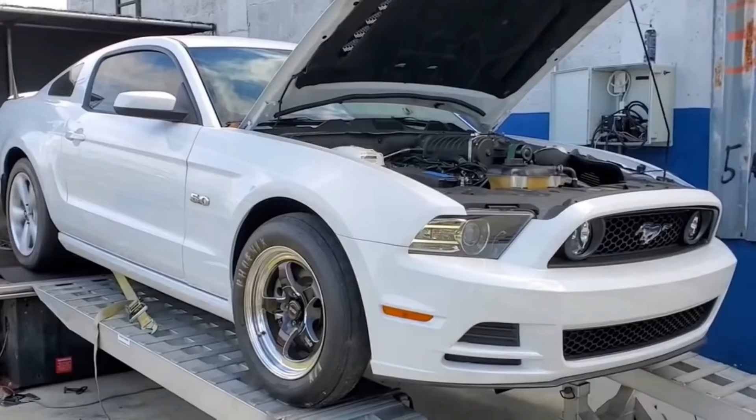What's up guys, it's Alex, and today I'm gonna play around with the white car a little bit. Why? Well, about 2 or 3 months ago, the car's been on pump gas. For those who don't know about the white car, it's a 2019 Mustang manual with a Vortech V3 supercharger. About 2 or 3 months ago, I started noticing the car starting weird, like it just turned on differently than I was used to. So I'm like, what's going on with your car?

Obviously I don't have the inlet on, and I'll explain why in a second. After driving it around for a while, I noticed it wasn't driving to its full potential. It made good power, but again, it's a daily driver. I don't dyno it, I don't go to the track often at all - the car has never been to the track. I just do 60 to 130 and drive it everywhere. But it started to start weird, meaning you go to start it and it goes jigga jigga jigga jung.

When you're used to your car, it normally goes jigga jigga jigga, you know? But this thing would go jigga jigga jigga jigga - it would kind of have a bit of a stutter. Hey, what's going on with you, buddy?

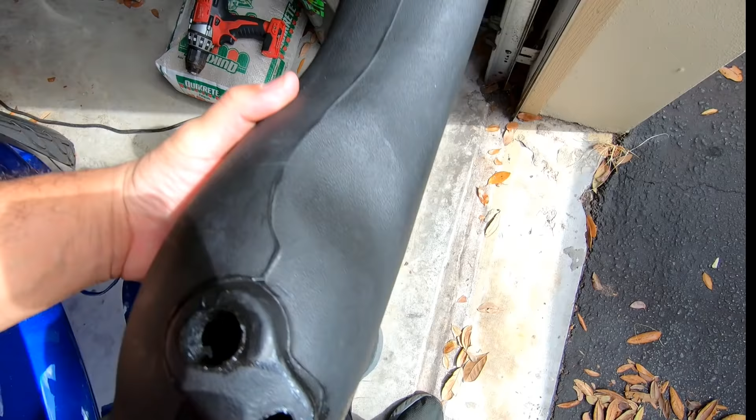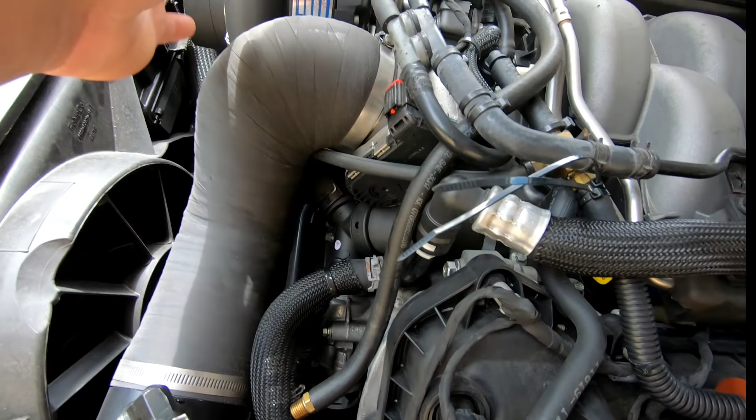All right, this guy - here we go, right here. So this would go onto the tube, right? Just go on there, and this is the IMRC stuff, but you can leave them open if you don't run the tube. So I started noticing, because this does not have a catch can, how much oil can potentially get accumulated and pushed into the blower.

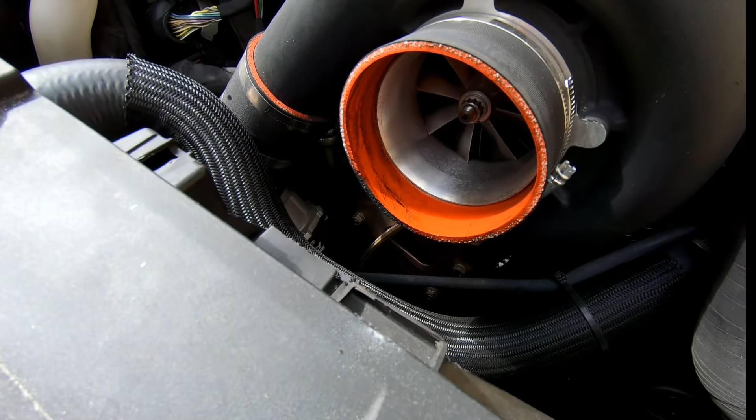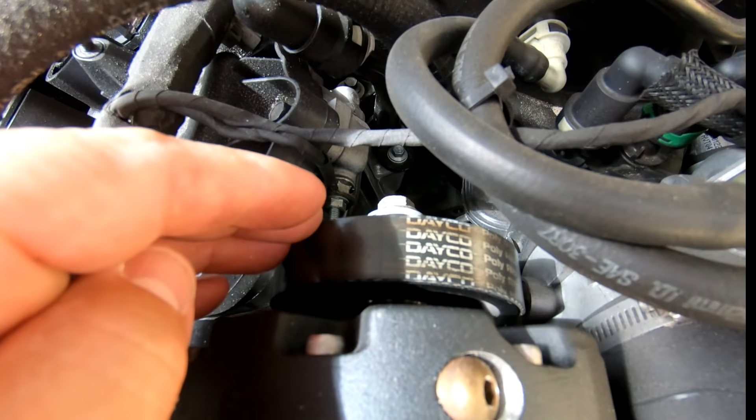So I said, okay, let me eliminate that, right? Once I eliminated that from the equation, I should just take this boot off. Once I eliminated that, the car felt stronger, but it was making almost a little too much boost for pump gas. It was only 10 PSI, because this is a 3.6 pulley, so it was only making about 10 to 11 PSI.

But these centrifugals can really get it - like they legit can get it. This is only a Vortech V3, a little Vortech V3 JT, and they can get it. They can actually whip up a decent amount of power.

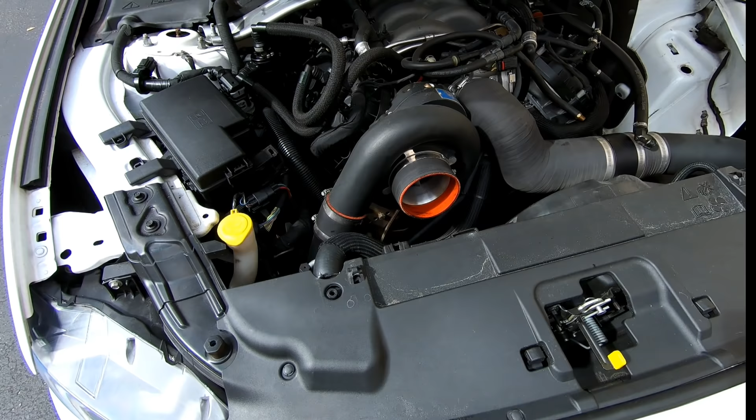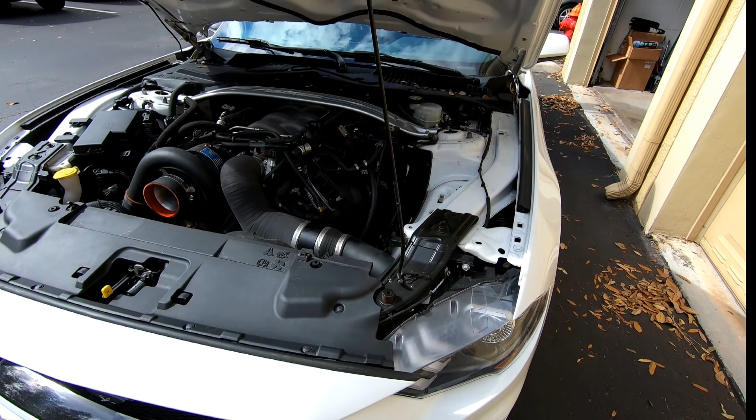So this car made about 700 rear horsepower on pump gas, which in my opinion is too much, because one day you can get a good batch of pump gas, and the other day you might not get the best batch. So what am I going to do? I'm going to put some C16 in this car and rag it out.

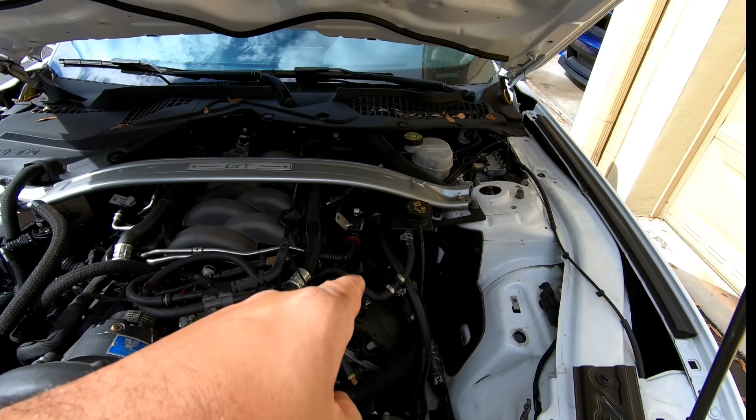Why? Because after noticing how it starts, I started noticing it wasn't feeling all that great. I said, Jake, let's do a compression test. Number 7 - not the one, number 8, this is 1 2 3 4 5 6 7 8, bank 1, bank 2 - so number 7, the third one down, was down 15%.

So I'm like, well, I must have popped a ring land or something based on crappy pump gas being in there. Again guys, if it was E85 or race gas all the time, I wouldn't care. But it's not race gas and E85 all the time. So I said, screw it, it's probably already hurt, so I'm not really gonna care. I don't race it, I just drive it around, and it's not affecting it adversely. So let me just drive it around.

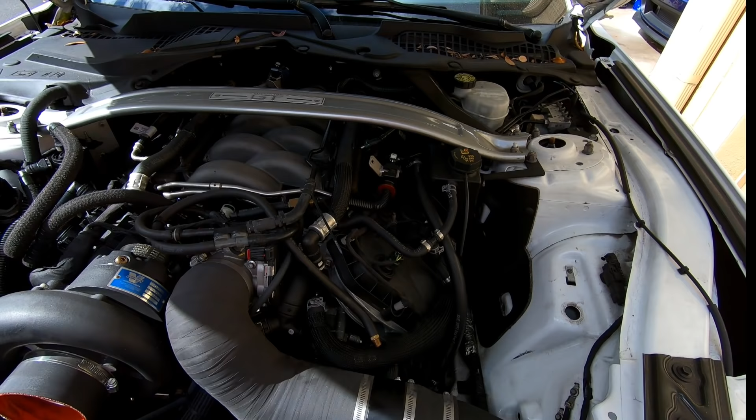So after a little while, I said, you know what, I was able to come across another Gen 3 engine. Jake from Power by the Hour got me another Gen 3 engine. And I said, you know what, let's rag this sucker out. And if it blows up, who cares? The clutch has 31,000 miles on it - it probably needs replacing. I got a shifter and a clutch from a fan.

Thank you very much. And I said, why not just rag it out and see what it can do? See what goes first—is the motor going to go first, is the clutch going to go first? And what am I going to do?

I'm going to put C16 in the car. I bought 3 jugs of C16 right here. Why C16? Well, it's a dense fuel, and this car does not have a fuel system, so I said let me get C16 in the car, which is like 14.7 stoic. And with a booster pump and FIC 1440s, I might even be able to pulley down to make more boost.

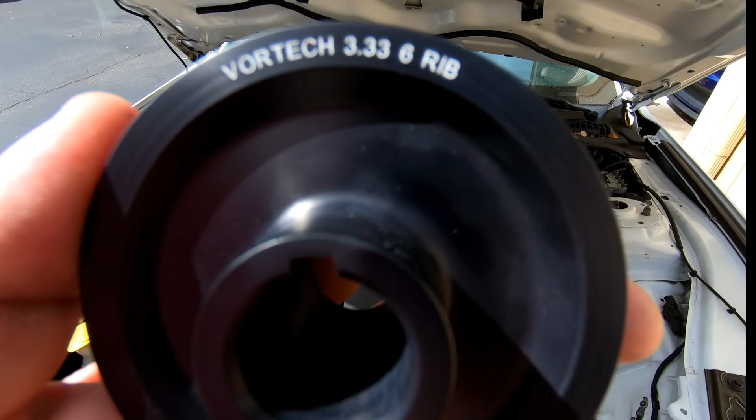Which then brings me to my recent purchase from Team Beefcake Racing, a 3.3 6-rib Vortech pulley. This should make about 14 PSI. And every single time I've tuned a car with a 3.3 on race gas or E85, it makes about 800 to 830 rear wheel horsepower.

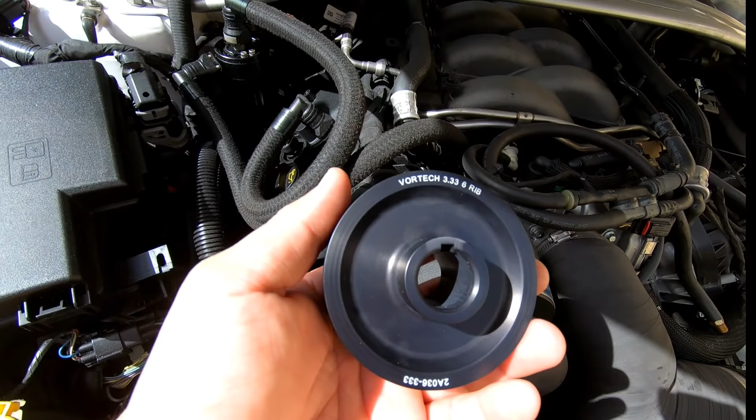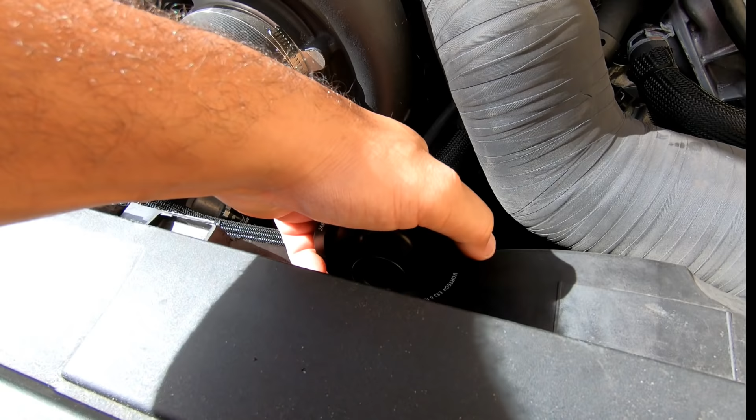So according to everything I looked up on the internet, you should be able to use the same belt if you reposition the tensioner, because it has adjustable holes down there. And according to Schrader Performance, I don't need one of the bolts here as a spacer—I can just remove it because it's rigid enough, and it should make my belt switching life a little easier.

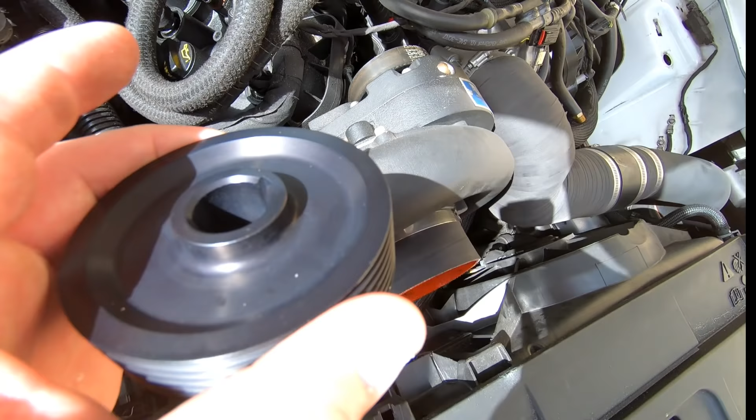But we'll see what I can do to loosen the tension, put a 3.3 pulley on, put C16 in the tank, and tune it aggressively. Now understand this guys, that is a 3.3 pulley.

I'll show you the 3.3 pulley. 3.3 pulley, alright. I have other pulleys—yeah, I'm a psycho. Where are they? Oh, a shitload of pulleys. Where you at? Here we go. Yeah, I'm about that life. God damn it, I got all this shit.

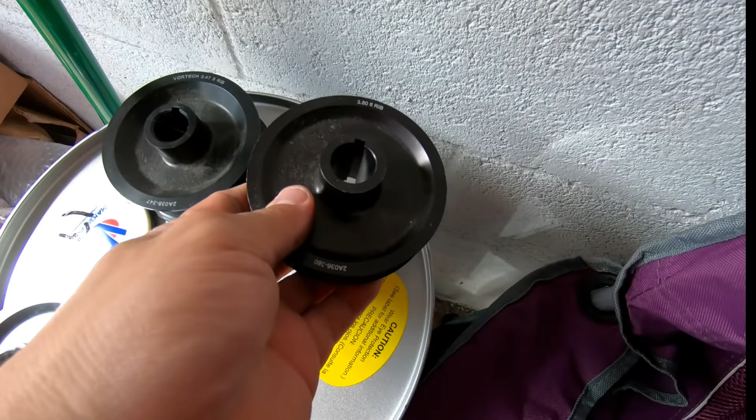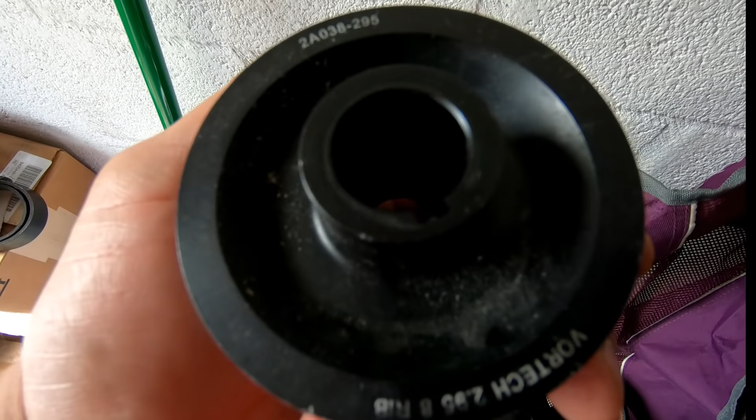So I have a 3.47 6-rib, a 3.8 which is a stock pulley, a 3.8, a 347, a 3.3, and the murder death kill pulley, a 2.95 8-rib.

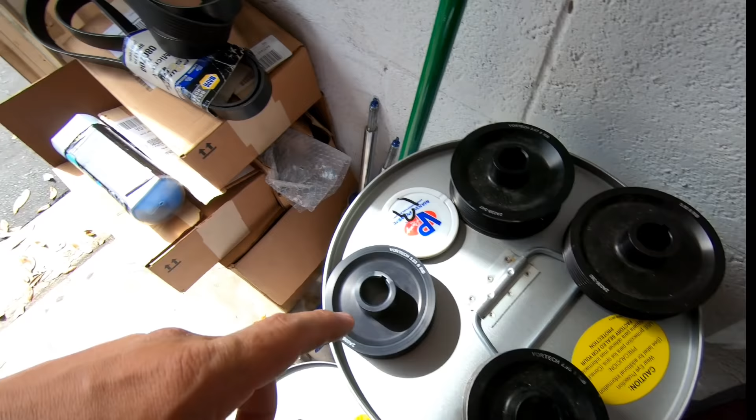I'm not gonna put any of these guys on. I'm gonna put this guy on, C16 in it. I got about a quarter tank of E85 in it, so I'm gonna drive it around, get rid of it, put C16 in it, and tune it aggressively.

Right, I flashed the tune on it, so now I'm gonna fill up with C16. Get about 10 gallons in it. Oof, I think it's dirty—the inlet's dirty. I'm gonna get about 10 gallons in it.

Go out and take it for a rip a little bit just to see what it does. This thing was dirty as shit.

So I think the car went 7.70, 60 to 130 last time, so the goal is to beat that. The car's gonna stay on 20s, R888s, just like it did last time. And if I want to get froggy later on, I'll throw the 17-inch drag radials on it just for the hell of it. For now, let's just kind of do it this way.

You guys realize how much of a pain in the ass it is just to put fuel in the car with these jugs? Whoever makes these jugs—what the fuck's wrong with you? Seriously, you have to pour this into another container so that you're able to put the gas in it normally. It dribbles everywhere, it's garbage. Just to put gas in a race car costs you $100 because you got to buy the jugs, the proper nozzles, everything. It's so annoying. Build proper shit. Unreal.

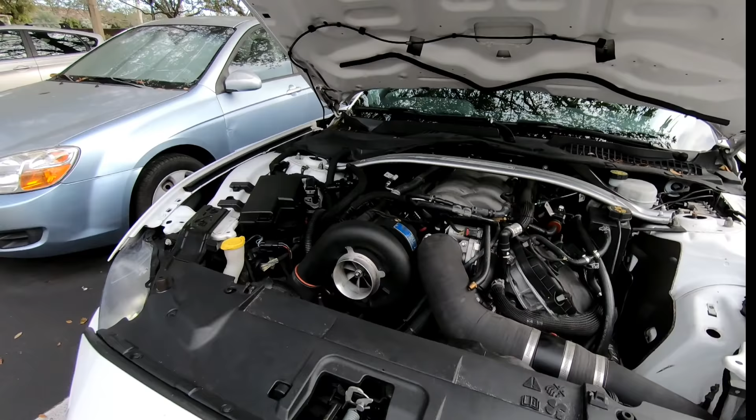Okay, I think I got it. So let's take a look at what needed to happen to replace the 3.6 pulley. Is it 3.6? Boy, yeah, it's a 3.6, because the other one's smaller and the belt went on easier.

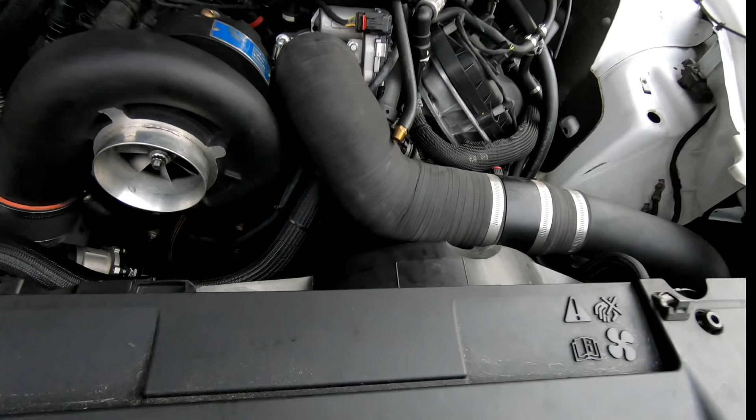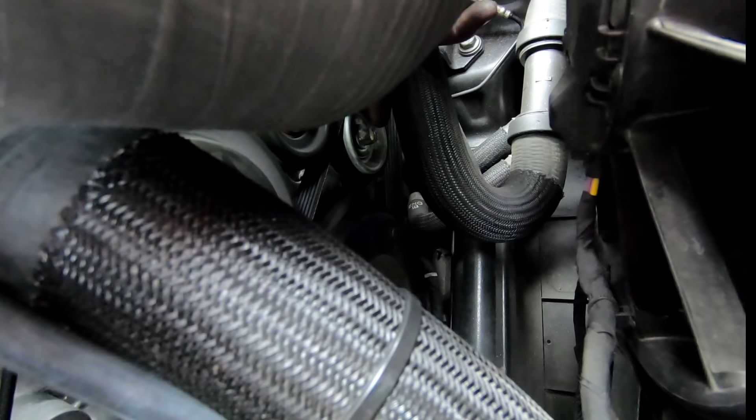Okay, first of all, that guy right there—if you look, the stock tensioner, which I'll try to sneak in here—let me point. This guy right here is the stock tensioner. You relieve the tension, and what I did was I left the 1/2-inch wrench in there and wrapped the belt around the socket to give it a little slack.

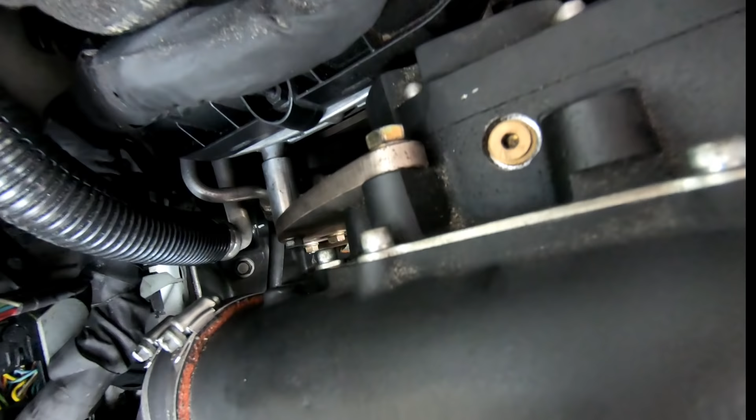Then I took it off the top, no problem. Undid this bolt, undid the 4 bracket bolts holding the blower to the bracket, and didn't take the whole blower off.

I just cocked it back and was able to sneak it out. There was a little stud here that was preventing me from bringing the pulley all the way out. I zipped it off with a Sawzall really quick, and it gave me that extra 1/8 inch of clearance that I needed.

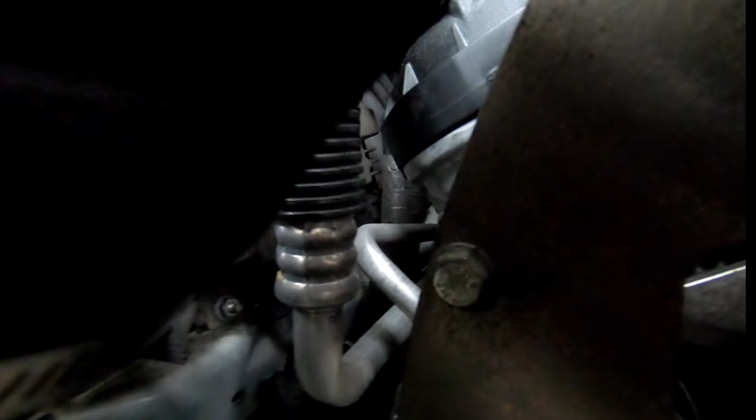Then this guy right here, you see how it's on the 2nd hole from the left? Well, it used to be on the 3rd hole from the left. Now I moved it over 1. I might be able to get away with 1 more, but I'm not 100% because I think the pulley is gonna rub on the dowel behind it. Back here, see the pulley, how close it is to that dowel? If I bring it over 1 more, it might be a problem.

And then after I relieved the tension, I'm sorry, when I put the belt back on and put everything on there, it was pretty damn tight. I mean, I'm telling you, the tension is pretty damn legit. So let's start it up and see if the belt flies off, and you'll see it live. Fuck it, we'll do it live.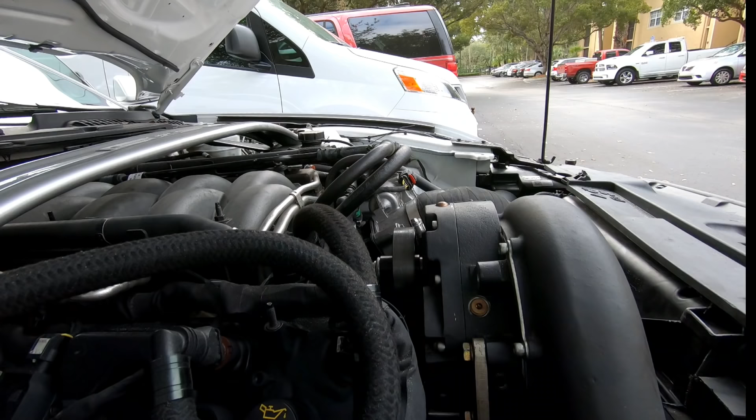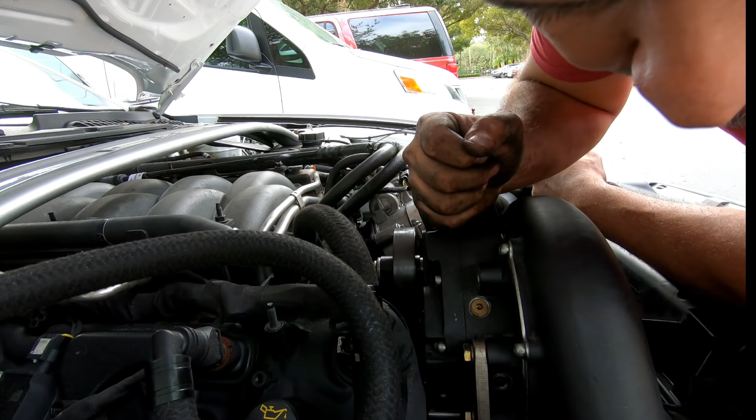I did install something right in terms of the MAF. The MAF is hooked up. Yep, MAF is hooked up. This is hooked up. Throttle's hooked up. Belt's staying, so that's good. Why aren't you starting? All I did was, maybe this guy's cocked underneath. No? That's good.

Let's see if I can keep it running until the wide bands come on, and then I'll data log it to see if there's some kind of leak or something.

The car is still showing that it has E85 in the system, so that's how long it takes to get the E85 off of it. Let me double check that bolt. Just shut it off and double check that bolt. But yeah, it's showing it still has E85 in the system.

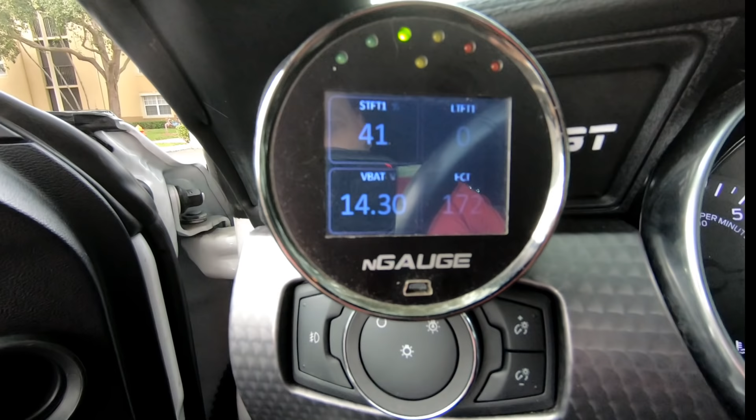Why? Because it's trimming super lean. So I think it still has E85 in the system, so I'm gonna keep it running until that guy gets down to something normal. I'll double check the tune to make sure the tune's on point, but I still think there's E85 in the system.

And just like that, my short-term fuel trims have stabilized. No freaking out. No, oh my god, Alex, let me email him, it's fucked up. No, I knew there was a lot of E85 in the lines and in the system, so I just sat here patiently until it worked its way through.

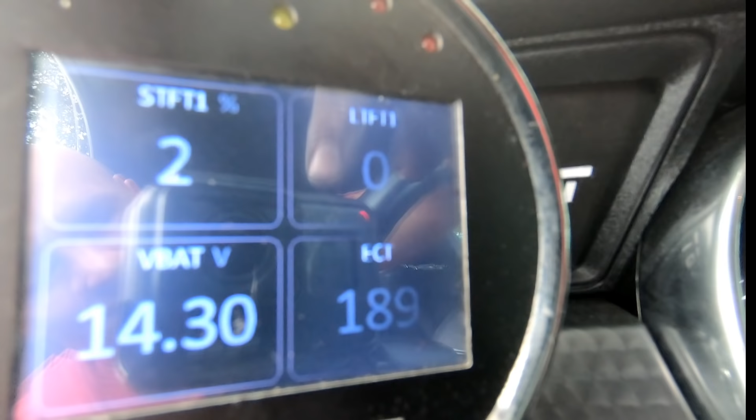All right, let's go out there and give it a little data logging session, make sure the belt's not slipping, and then we'll do some 60 to 130 testing. Look at that. That's just bullshit. Let me rev it up, watch it come back down. Oh yeah, no problemo, baby, no problemo.

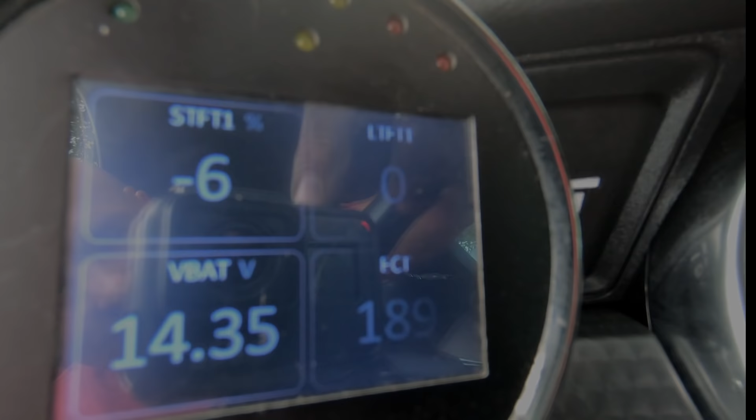Okay, so I got myself another nGauge. Why? Because this is an old 2012 unit, very old, and the screen started to act up, and I don't want to have any issues data logging. So I'm like you guys, I don't get free nGauges. I bought every car I have has an nGauge, so any nGauge can data log any Ford vehicle. I'm gonna stick this nGauge in there and data log with it, and only use the other nGauge to flash with, because that's all it's good for.

Even though it takes a little while to get the screen to flash, it's a big pain in the ass. But I'm gonna data log, key on, diagnostics, data log, boom, boom, boom, nice and quick. Is there an 18 and up? Nah, it's an 11 and up generic. 11 and up works, normal mode. Boy, that thing works really good.

Start data logging, drive it. What I'm gonna do is a 3,000 to 6,000 RPM hit in third, just like I would ask you to do. If that looks good, 3 to 7,000 RPMs. If that looks good, full send to 7,800. We'll see with timing, air charge temps. That's the other thing. Smaller pulley size, more boost, higher IAT, but it's cool out. It's 73 degrees in Florida, so it might do okay. Let's start logging.

Let's go for a ride. It starts, does it stay running? It stays running. Okay, let's get out of here.

Feels good. There's not much better smelling fuel than C16. I know a lot of you can say it's leaded, it's gonna kill your O2 sensors. I'm not gonna run it a long time, probably just for a day or two and go back to pump gas.

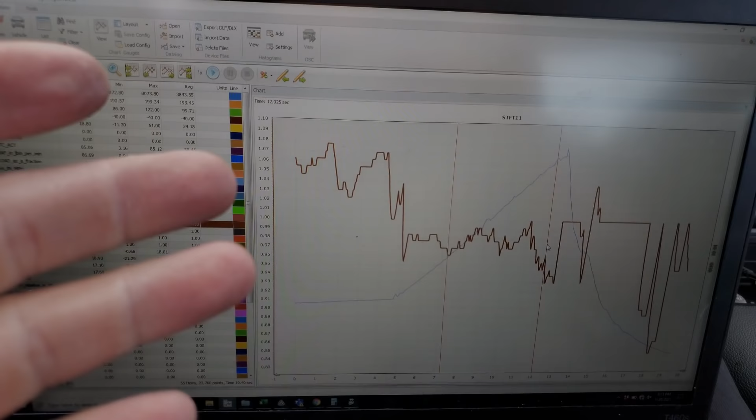That's the key. What I'm going to do is record it with my phone so you can get a better look at what I'm talking about. So this is short-term fuel trims, and you can see on the left here, 1.0 is like perfect. So at wide open throttle, it's like 0.96, and then it gets a little rich up top.

When you graph that rich, quote-unquote rich, it's about 7% at bank 1. Bank 2 is pretty much on the money, 0.78, 0.79 lambda. It's a little on the rich side, but that's okay. Look at the MAF frequency, it's moving serious there. 118 miles an hour in third gear.

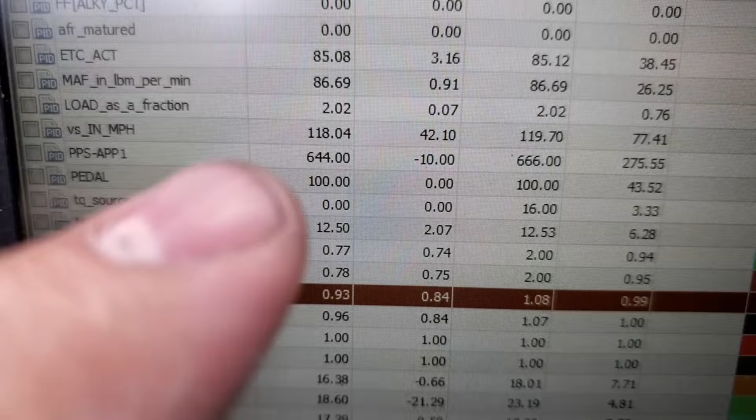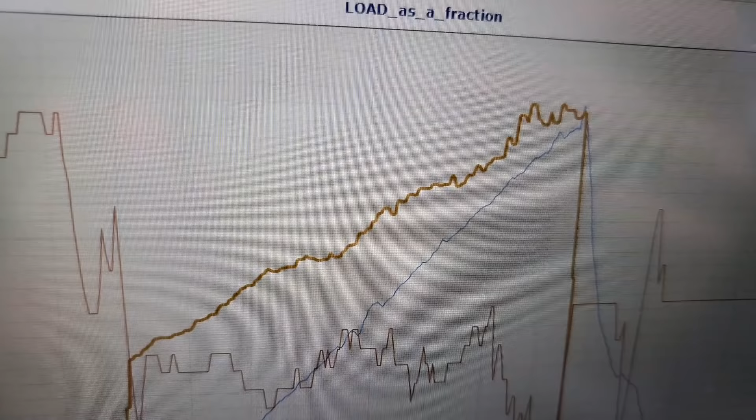2.02 load, air load means- so when it comes to air load, where the fuck is the mouse? Here you go. The reason I look at air load is to check for belt slip. I don't see any belt slip happening here. The other way to check for belt slip is MAF frequency. MAF frequency dropped off a little bit way up top there, but what RPM was that? Yeah, 70.

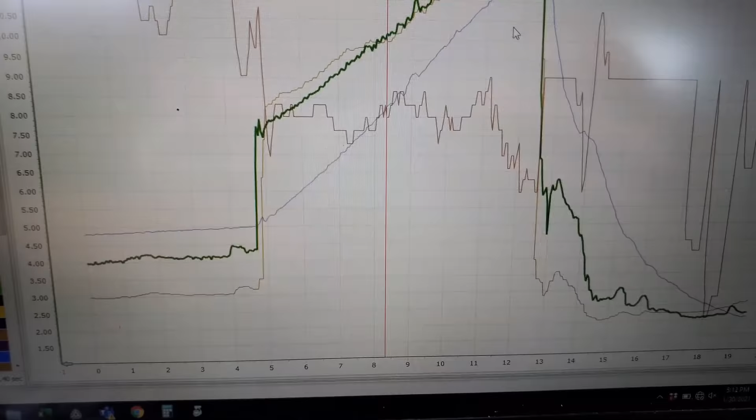I think I went up to 8,000 RPM like a fucking idiot. Let me see. Bam. Yeah, I went to 8,073.

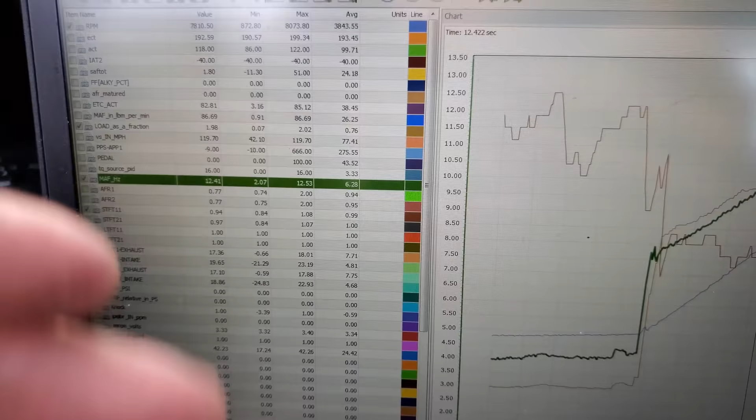Okay, time to get some 60 to 130 pulls in because the car seems to be doing well. What are air charge temps? IAT, air charge temp, 118, 122 max. Dude, not a problem. All right, let's do some 60 to 130.

We'll see if I can get a 60 to 130, take off slow, and if it starts recording I'll do a hit 60 to 130. See if I can get into the 7s. I've never gone into the 7s 60 to 130 with this car, so we'll see how everything goes. There he goes, recording now.

Look at that, 7.23. That is a half second quicker 60 to 130 than E85 and a 3.6 pulley. And I didn't blow it up yet.

Okay, let me take a look at the log and make sure everything looks good. Wow, a half second quicker 60 to 130 with C16, a 3.3 pulley. And I would have never tried this if it wasn't already hurt. Do you know what I'm saying? The motor's hurt, it's down a little compression on number 7. Oh, C16 smells so fucking awesome.

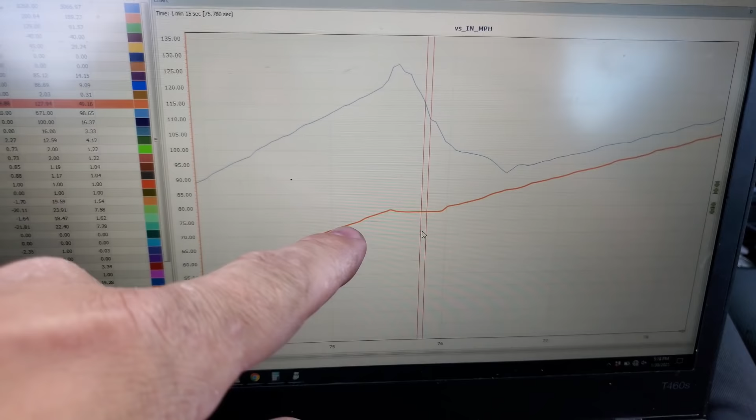So as we can see, the clutch is complaining a little bit on the shift. The RPMs, actually the mile an hour, didn't climb. It kind of flattened out and then came back up, telling me that there's a potential clutch slip issue happening. But no big deal, I knew this was on borrowed time.

It's 31,000 miles on this clutch, but the 1.2, we're looking at good fuel trims, good AFR. We're looking at 20 degrees of timing. We're looking at air charge temps of 93 degrees. Very, very good, dude, everything is on the money.

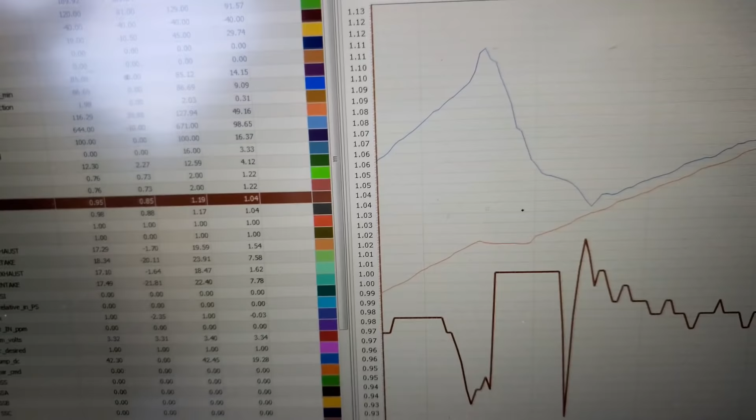Let's look at the fuel trims when we graph them up against RPM and mile an hour. Yeah, it's trending on the rich side, but that's okay. I'm not gonna trip because it's only about 5% rich on one bank and 3% rich on the other. 5%, 3%, okay, I mean 7.2 from 7.7, I think.

So third gear, AdvanceTrac off, draggy hit, 60 to 130, and see how one shift affects it versus 2. Data logging, video, so many things to do.

Clutch slip. Hard on the brakes in case someone's watching.

763. So starting in third gear with a Paxton, that needs RPM to really start making some power. This is not twin turbo where it makes nut down low, or a TVS where it makes nut, or even a Whipple that makes nut down low. This thing needs RPM, so you're gonna have to start off in second in a similarly equipped vehicle to get your best 60 to 130 time.

Good test. 4/10 difference. Wow.

Well, I think that's it for the video. That was the main test: get it on C16, see how the car reacts to C16 and a 3.3 pulley, get myself familiar with the pulley configuration, with the belt, with the idlers, with the whole nine. It's not that difficult. I'd say difficulty for a guy mechanically inclined is a 5. It's not really that hard to change the pulley on these things. You don't have to take the head unit off, you just have to move it out of the way a little bit. Aside from that, pretty straightforward.